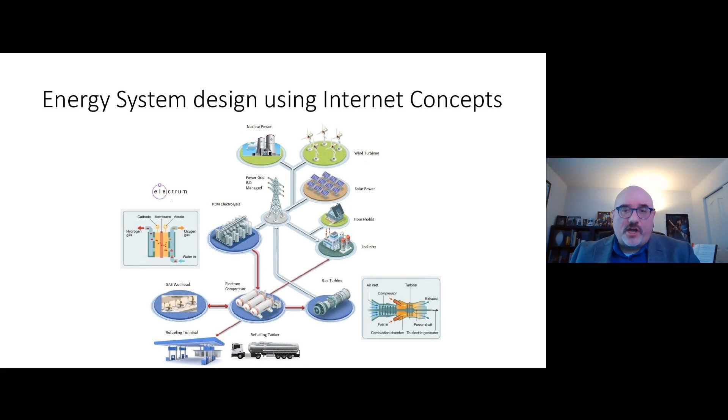The state of Michigan sits on a salt deposit, and oil and gas tends to collect underneath salt. Rock salt, especially under pressure, tends to be plastic and is impervious to hydrogen. So that's actually one of the places where you can store hydrogen, under a salt deposit, deep underground, geological storage. Now, the thing about it is today, the state of Michigan has 36,000 depleted oil and gas wells.

So what happened to that refinery there, once they depleted that oil and gas field in the state of Michigan, they ended up becoming dependent on oil being transported by oil tanker across the Great Lakes. And that's Canada. You go down to Niagara Falls, a set of locks there that get you out to the St. Lawrence Seaway, the Atlantic Ocean, the Gulf of Mexico, Nigeria, and the Middle East. Okay, now there's some good things about that business and some not so good things about it. Here are the not so good things about it.

Number one is you have to consider the transportation costs. So they transport crude oil from an oil field to this refinery. They're using truck, train, pipe, or ship to do that. So they're expending energy and cost to do that. Then at the refinery, either they're burning some of that crude oil or they use flare gases and/or natural gas to burn it in a gas turbine to generate power at the refinery for refining crude oil.

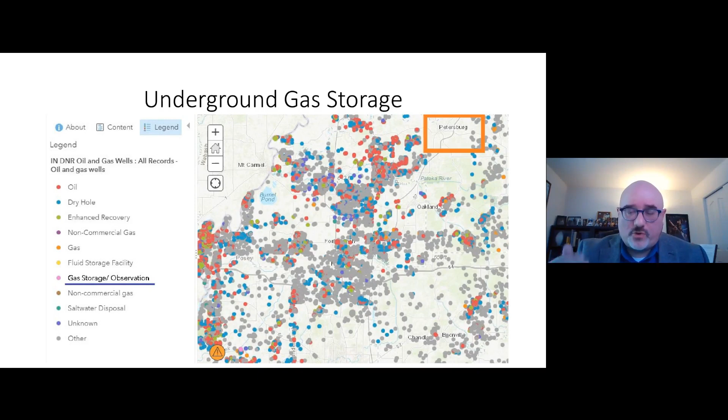Can I get to the next slide, please?

The limiting factor, believe it or not, is actually the compressor technology. The industrial reciprocating compressors being used today, if you're compressing natural gas or carbon dioxide or any of those other gases, you can get them up to 69,000 psi, right? But if you take that same device and you put hydrogen in it, you'll be lucky to get it above 200 bar, which is 2,900 psi, and it has to do with the fact you're dealing with the smallest molecule in nature. When you read through that paper, hydrogen compressors, it'll step you through the whole thing.

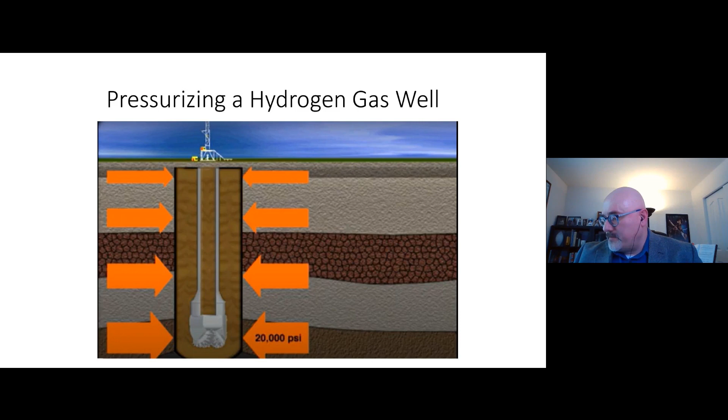the country. For example, down in the tip of Florida, around the Tampa Bay area, there's a salt dome there. And one of my pet, I'd-love-to-do type projects is to drill down underneath that rock salt, horizontally drill it and frack the rock and make a synthetic hydrogen repository. And I'm fairly certain that'll work, mainly because I know that rock salt under pressure is plastic and it's impervious to hydrogen. The other places are those sedimentary areas.

Now, there's a type of limestone called dolomite. And dolomite, especially when it's saturated with rock salt, because it has to do with salt water, becomes impervious to hydrogen. Now, it is possible to drill down 10,000 feet and horizontally drill and fracture the rock to form a hydrogen repository. It's just that those geological structures aren't nearly as resilient as the rock salt.

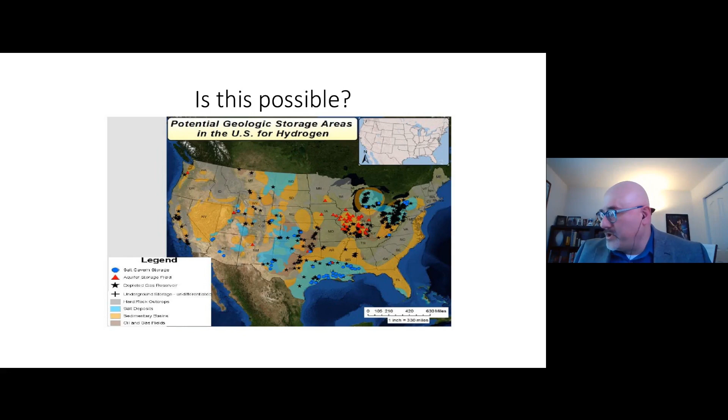It just so happens that in oil and gas, there's a type of well called a hydrogen sulfide well. It's a poison gas well. But hydrogen sulfide tends to be very corrosive. So the oil and gas people actually have pipe and valves and Christmas trees specifically that work great with hydrogen.

So you'll have to have it re-drilled. For example, just a straight natural gas well, you have to have it re-drilled: stainless steel pipe, stainless steel wellhead, and a stainless steel Christmas tree. That's the thing sitting on top.

They call it the Christmas tree. So when you're talking just re-drilling the well, you're usually talking $2 to $4 million. I'm talking about an existing natural gas well, just taking advantage of the geological structures that we already know are there because we've depleted a lot of those wells already. Now, as far as the average amount of storage that one of these wells will hold, the average is about 6.5 million cubic meters of storage.

Now, if you ask why do we know this, well, understand from the day that well was put into production until it went dry, the gas was metered coming out of there because your state government was making tax money off of it. The geological owner, they made money from it. So we're measuring what's coming out of this thing, and from the time it was drilled to the time it went dry, we know exactly what came out of this thing, and from that we can calculate, hey, how much storage will this thing hold?

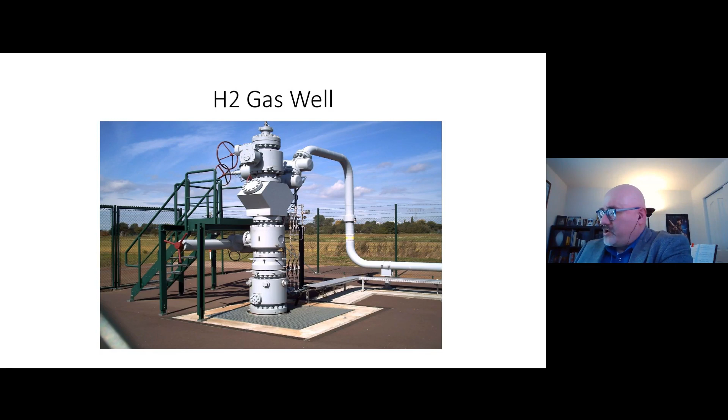I live in Indy. But anyway, a Millennium Reign Energy megawatt grid scale electrolyzer will consume 1 megawatt hour. For 1 megawatt hour of power it will generate 22 kilograms of hydrogen at 20 bar. And at 20 bar pressure, that hydrogen will occupy 13,200 liters of volume. That's per hour.

Now, when I show you how inexpensively you can buy power off the markets, off the power grid, you're going to quickly realize, well, my problem isn't generating the hydrogen, but even at 20 bar, 13,200 liters of volume, your problem is going to be a storage problem. Where do you store that much gas? You're going to have a hard time finding storage containers that large for storing that gas. And the only economical place you're going to be able to store that gas is going to be in one of those depleted wells that I just showed.

Okay. So as far as life cycle goes, I want to make sure I get this in there. The mean time to failure for a megawatt grid scale electrolyzer, and that's an electrolyzer that fits inside of a 40-foot cargo container, so that'll give you an idea of scale and deployability and so forth. The life cycle target is 90,000 hours mean time to failure, and that's once every 10 years.

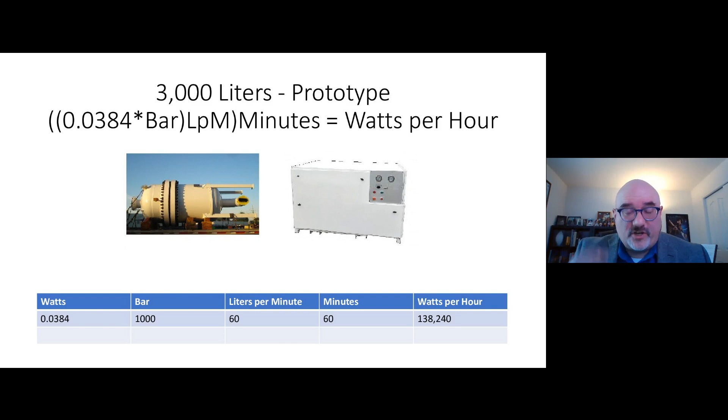Now, the maximum amount of pressure that device was actually designed for is 4,100 bar. The highest I've ever gotten it up to was 57,860 psi. That was June of last year. I blew a coupling out, so right now I'm kind of in search of a master machinist to fix that coupling. But that's just using that device right there. Can I get you to go to the next slide, please?

Now, if we're going to do this to scale, for industrial scale compression of hydrogen, the tank I would actually need to use is that thing right there in the back end of that semi truck, that trailer right there.

What that is, that's the container for a cat cracker. It's a 15,000 liter tank. It's ASME certified to 5100 bar, 73,000 psi. It has a stainless steel liner that is used in an oil refinery to catalytically crack crude oil into diesel and gasoline. And oh, by the way, they run hydrogen through that thing to react with the sulfur to remove sulfur from the final product.

Right. So there's a piece of equipment that already does what I need right there. And these devices, if you're talking about mean time to failure, they're designed to last from 20 to 30 years. So it's a pretty tough piece of metal that already exists.

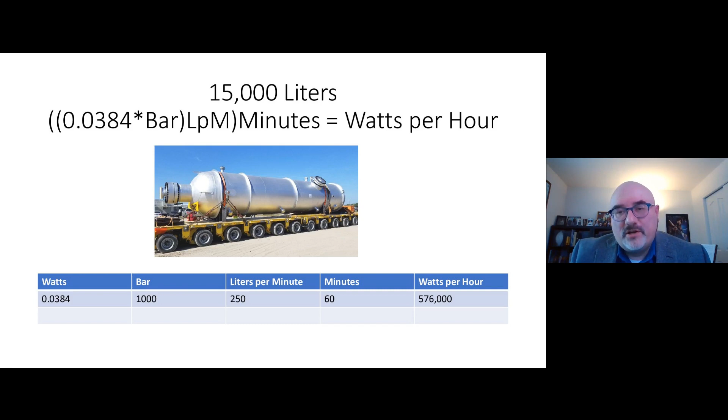So you would have to consume 1 megawatt of energy producing the hydrogen and consume 576,000 watts of energy compressing it. So you can roughly say it only takes 1.6 megawatts of power to produce 22 kilograms of hydrogen and then compress it down to 1,000 bar, 1.6 megawatts, per hour.

Can I go to the next slide, please?

the idea is you would basically use 2 of those Millennium Reign Megawatt grid scale electrolyzers, one electrolyzer matched up to each one of those tanks, right? You would be filling one tank up with gas and the other tank would be compressing hydrogen, and you'd flip states back and forth between those 2.

But the point is that was a system between the electrolyzers and this equipment right here that would be able to produce 22 kilograms of hydrogen per hour and compress it to 1,000 bar per hour, right? And 22 kilograms of hydrogen works out to you could refill 4 Toyota cars per hour just by using this equipment. Of course, you can obviously scale this to be a lot larger than what it currently is. But this is just what we currently have that we can do today.

Can I go to the next page, please?

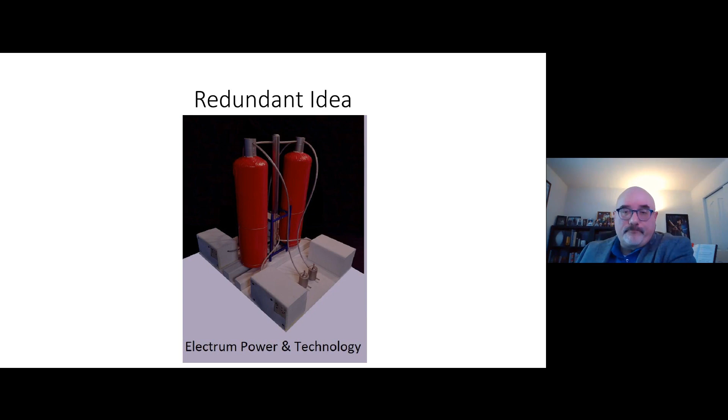Now you could scale that up to a GE 9HA. That's a 557 megawatt gas turbine. Now there's something called combined cycle, and what that is, I use the exhaust from this gas turbine to heat up a boiler. Basically, it's called a heat recovery unit. You can do single cycle or dual cycle, and what they call a combined cycle.

First stage is where you heat up the steam and pump it into a high pressure steam turbine. Right, and then you can take that and run it, and that's combined cycle single stage, and then you can go to 2 stage, which takes that high pressure steam and bleeds it into a low pressure turbine. The point is instead of it being a 50 megawatt gas turbine, if you're willing to wait to heat up that boiler, in 24 hours you could be producing 150 megawatts worth of power coming out of this device.

If you're asking how much hydrogen this device burns per hour, it burns 5,000 kilograms of hydrogen per hour. And if you're asking how much natural gas that is, 5,000 kilograms of hydrogen works out to a little over 10,000 kilograms of natural gas per hour. So 5,000 kilograms of hydrogen is actually 5 metric tons of hydrogen.

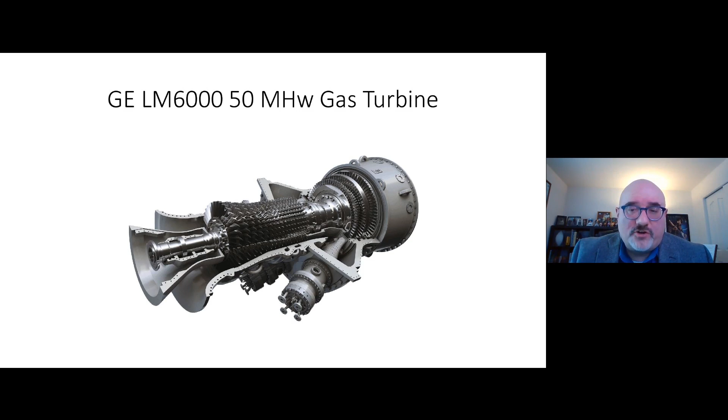Now, even though that seems insurmountable, how is that even possible? Where the heck are you going to store that much gas? I'll show you how that's possible. So this is not quite a daunting thing. Now, it is important to know that on a GE 9HA, like I said, you can start that up within 30 minutes, 557 megawatts worth of power coming directly off that gas turbine.

If you take the exhaust of that and lead it into a heat recovery unit to heat up a boiler, and you do two-stage steam, 9HA, 557 megawatts worth of power, within 24 hours you can have 1.6 gigawatts worth of power online producing electric power. Now, as far as I know, that's one of the few replacements for a nuclear-fired power plant. The other one is obviously a coal-fired power plant.

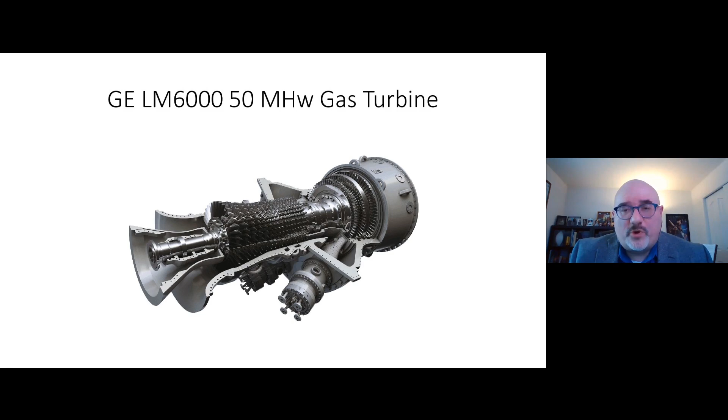Working for IPL, I worked on my share of coal-fired power plants. But the only other option is one of those giant 9HA GE gas turbines. And if you use combined cycle, two-stage, that is a 1.6 gigawatt power source that can replace a nuclear-fired power plant, especially a 1.1. Usually, most of those power plants are 600 megawatts to 1.1 gigawatts worth of power. Yeah, pretty much that.

So that describes that system right there: the electrolyzers, the wellheads, the Electrum hydrogen compressor, and the gas turbines. Now, down there I've got a service station. You could, as an option, attach a service station using a utility pipeline. The only note to this is that the Electrum hydrogen compressor is agnostic to a wet gas.

So any gas you're getting out of an electrolyzer, whether it's proton exchange membrane or alkaline electrolysis, is going to be a wet gas. If you're storing gas underground in a gas well, that'll be a wet gas, and sometimes it's contaminated with natural gas. Now, a gas turbine is not as efficient as a fuel cell, but the GE gas turbines' efficiency is 50%, and they burn anything, versus a hydrogen fuel cell, which is a bit particular about what fuel it'll burn.

Now, with that service station, you'll have to use a membrane to filter the gas. If you're starting out with a pressurized system at 1,000 bar, regulating the pressure down to 700 bar is easy enough, and you'll run it through a membrane. Luckily, hydrogen is the smallest molecule in nature, so there are lots of membrane materials that make sure the giant water molecules and natural gas molecules can't go through, and that way you've got pure 99.99% hydrogen going to that service station for semi trucks, cars, and whatever other equipment you need to power off a hydrogen fuel cell.

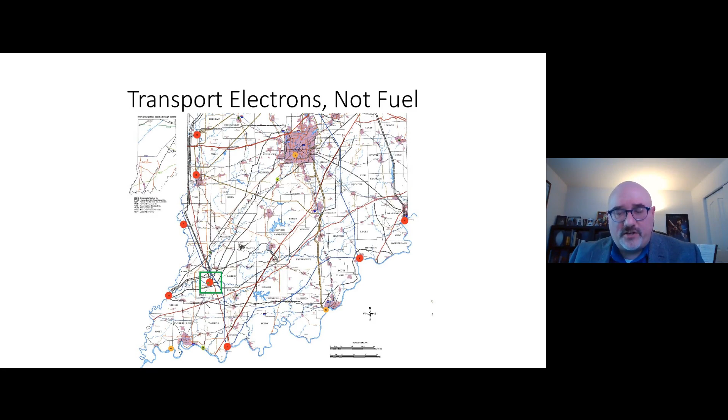If you invite the CEO of NextEra onto your forum and have him talk through it, he's going to tell you something shocking. They're putting in wind farms and solar farms, and they're not environmentalists. They're not doing it for environmental reasons. They're doing it because the coal-fired power plants are putting themselves out of business, and it has to do with the quality of the coal.

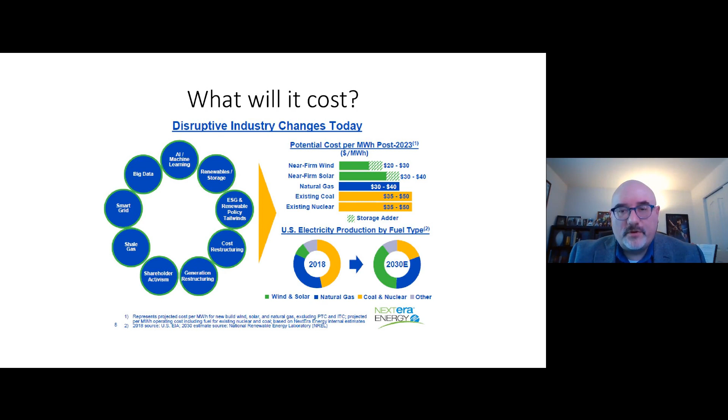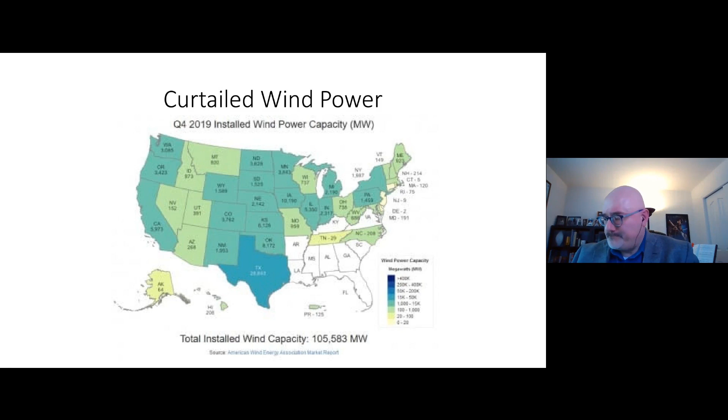And let me put that in perspective. Can I get the next slide, please? Okay. So that's just here in the state of Indiana. That green box with red in it, that's a town called Fowler, Indiana. That's a wind farm town. So from there northward, that's wind power country. To give you an idea, here in Indiana, we curtail 7 terawatts of wind every year.

That's 7 trillion watts. Now, if you turn that into hydrogen, remember, that's 1 megawatt hour of power, 22 kilograms of hydrogen per hour. That converts into 154 million kilograms of hydrogen, which is equal to 154,000 metric tons of hydrogen we could be producing and storing today. If you're refilling Toyota Mirai cars, you can refill your car 25,600,000 times on that. If you're refilling cars once a week, we could support a fleet of 493,589 cars per year simply on what we're throwing away.

If you're talking about some of those GE gas turbines, remember what I said about an LM6000: it will burn 5 metric tons of hydrogen per hour. So 5 metric tons divided into 154,000 metric tons, you're going to get a number that leads you to tens of thousands of hours worth of power if you just do simple math.

And even the 9HA, I did the math on a 9HA: it's 40 metric tons per hour of hydrogen, and burning through 154,000 metric tons of hydrogen works out to like 160 days. So you could have that 9HA generating 1.6 gigawatts worth of power for 160 days. And hopefully, if that is a backup power source for your nuclear power plant, I would hope that you could get it back online within those 160 days.

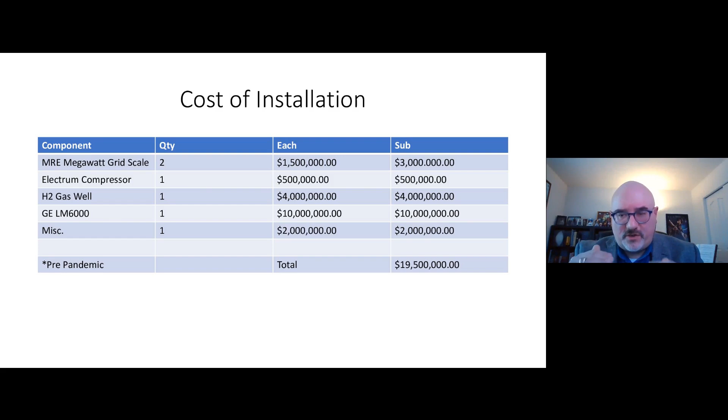So what I'm trying to tell you is the price of that natural gas, as we put more and more demands on it, is going to go up. Later on, we can talk about where that break even is between hydrogen, electrolysis, and natural gas. There's a break even where you get a BTU to BTU crossover there. But we can talk about that later.

I think I've got the last one. That's just questions. Wow, there's a lot of information that Dan put out there. A lot of numbers and technical approach on his vision for how the hydrogen piece could work.